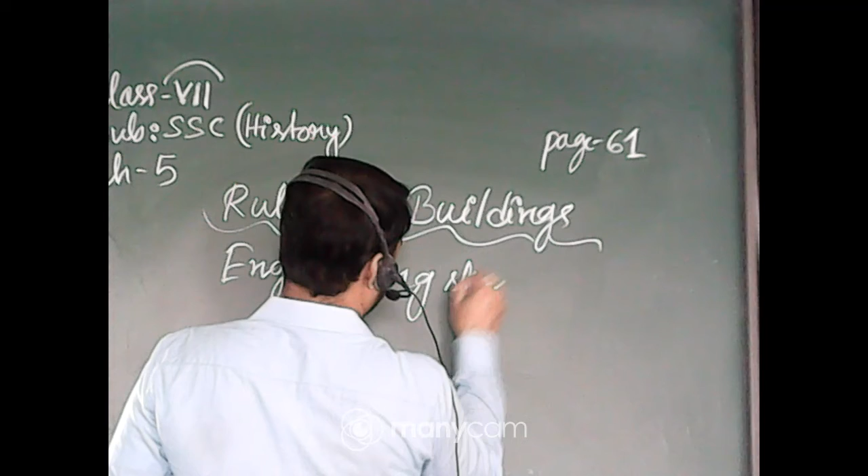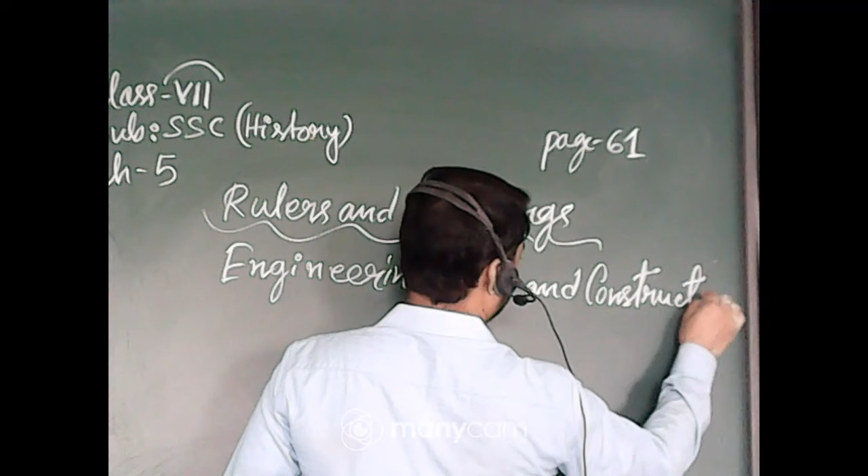Today's subunit I am going to discuss is engineering skills and construction.

So what is the main topic here? I hope you remember the previous class, where I discussed how rulers prioritized the temples, monuments and palaces which were built during the medieval period. Medieval period means 8th to 18th century.

And monuments provide an insight into the technologies used for construction at the time. Take something like a roof, for example. We can make this by placing wooden blocks or wooden beams or a slab of stone across the four walls. But the task becomes difficult if we want to make a large room with an elaborate superstructure.

Insight means an idea - it gives an idea of how they acquired technology and what kind of technology they used. This is the given insight into their engineering skills. So the task becomes difficult if we want to make large rooms with an elaborate superstructure.

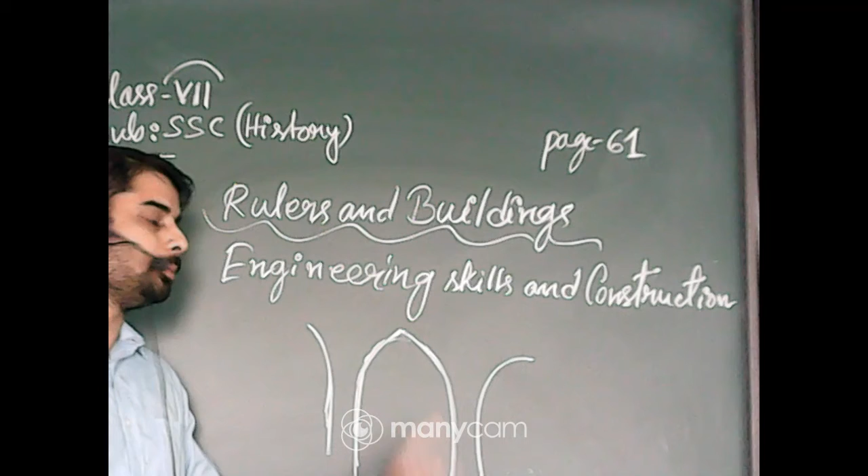This type of Trabeate architectural style can be found in the Quwwat-ul-Islam Mosque, New Delhi, dating to the late 12th century. This type of structure or technology is called Trabeate style, where a horizontal beam is placed across two vertical columns.

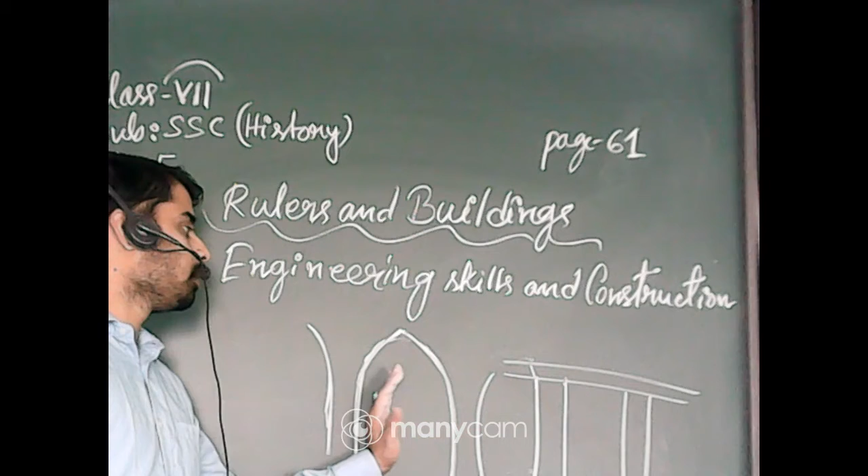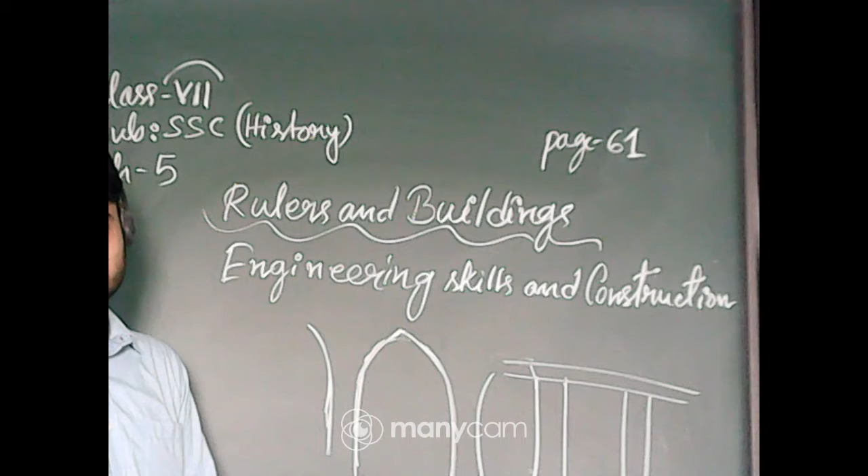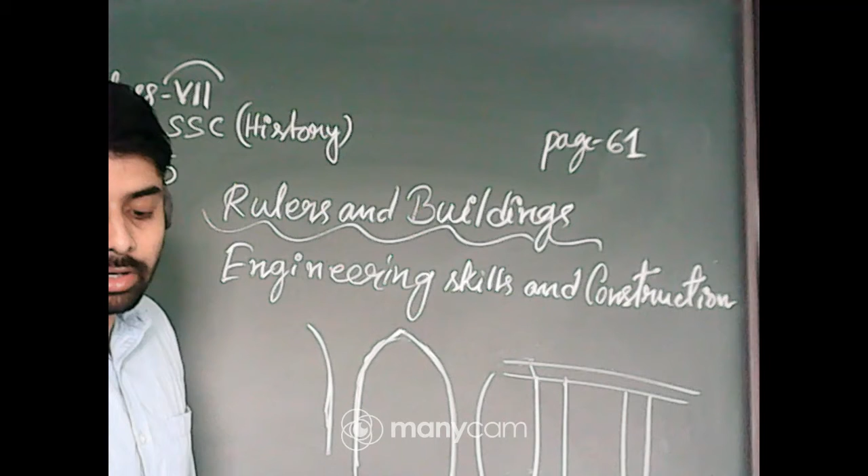Sometimes this type of structure also made straight pillars in this way - this is also Trabeate style, but the most popular one is in India, when the Arabs first came, and the Delhi Sultans made a lot of monuments, palaces and forts using this pattern. Number 2: in the 8th to 13th century, the Trabeate style was used in the construction of temples, mosques, tombs and the buildings attached to large step wells or baolis.

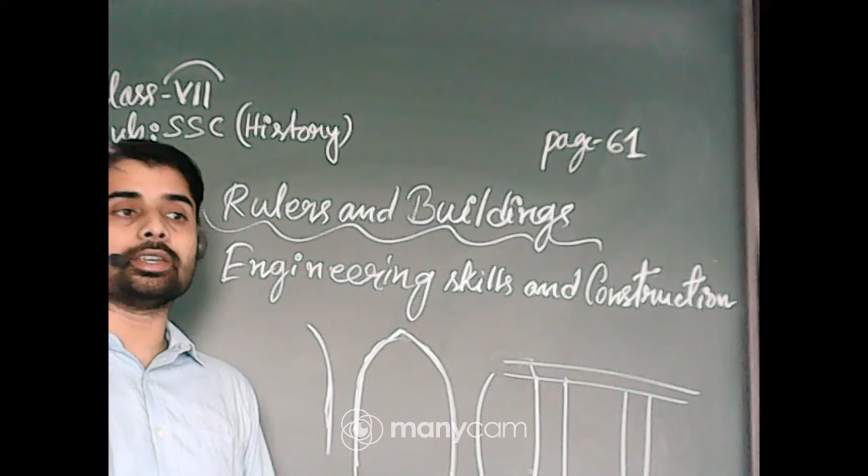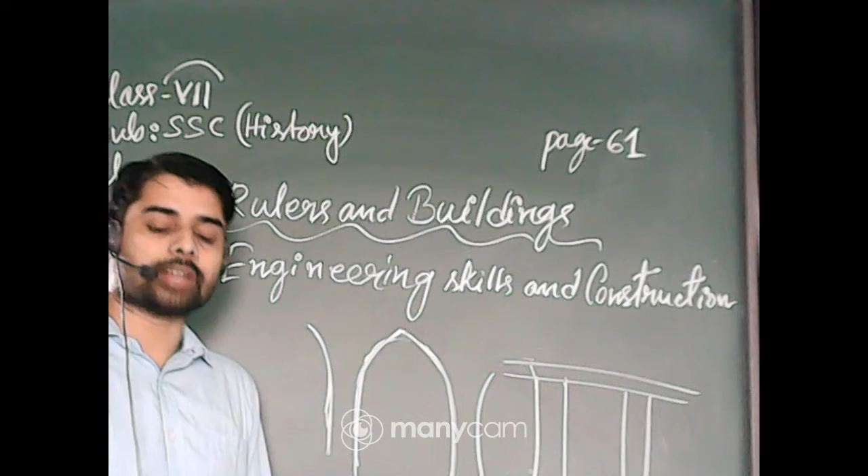What is a baoli? The large stepped wells, such as the Ugrasen ki Baoli present in the Purana Kila region of Delhi, as well as the Rani ki Vav, a World Heritage Site in Gujarat. These are baolis - stepped wells, big wells with steps.

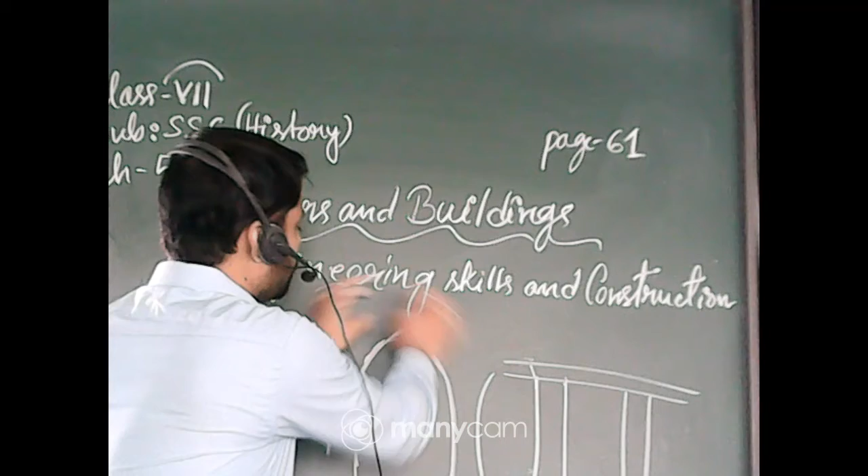All these things were made with this technology, the Trabeate style of architecture, where two pillars were made and joined to make the doors and windows. This is the Trabeate style, with two pillars and horizontal beams.

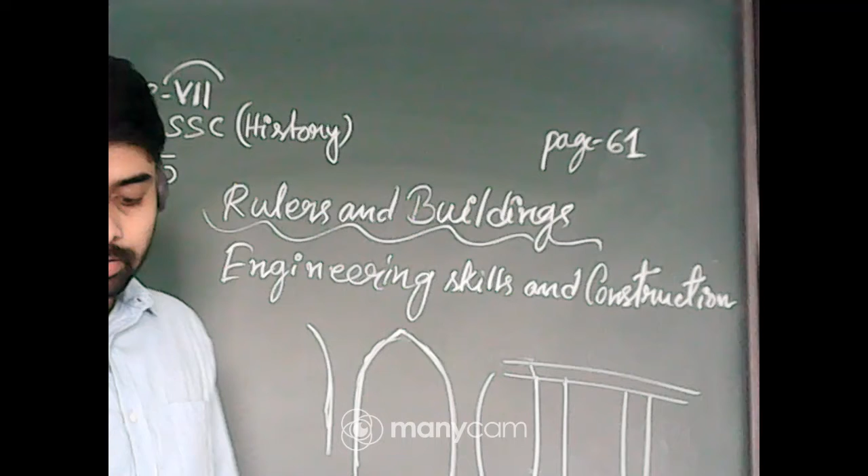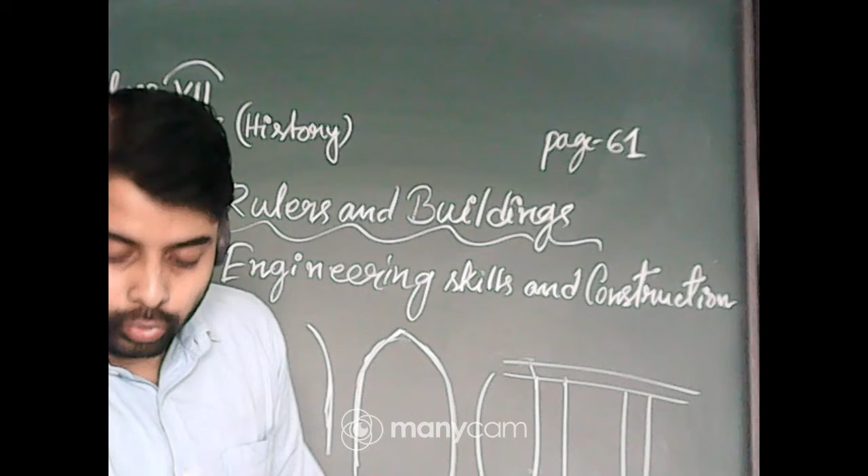Now, temple construction in the early 8th century. Apart from this, how did Indian rulers, Indian kings, between the 8th to 13th century, construct temples? At the time, a lot of temples were constructed in various parts of India.

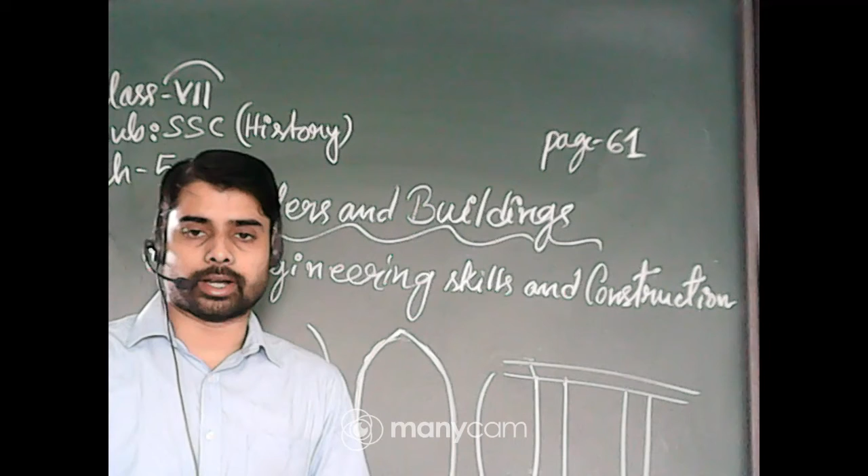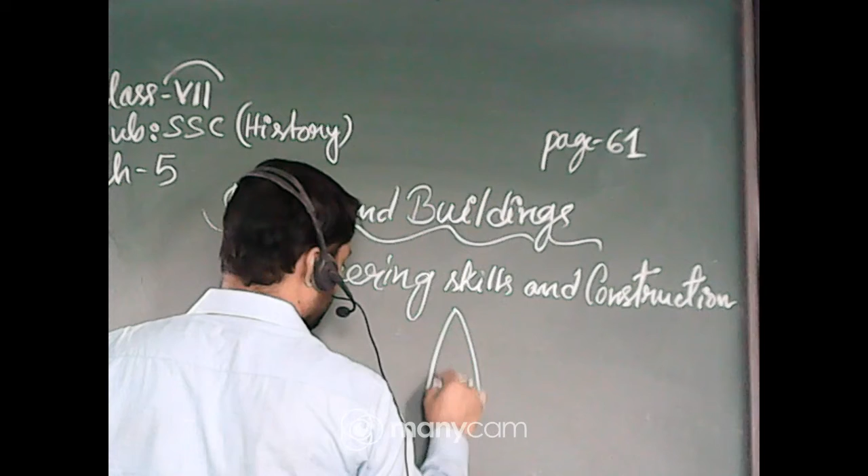Mainly two types of temple architecture were found at the time, that is the Nagara style. Nagara style temples are mostly seen in North India, such as this way - single Shikhara or multiple Shikharas present in a temple.

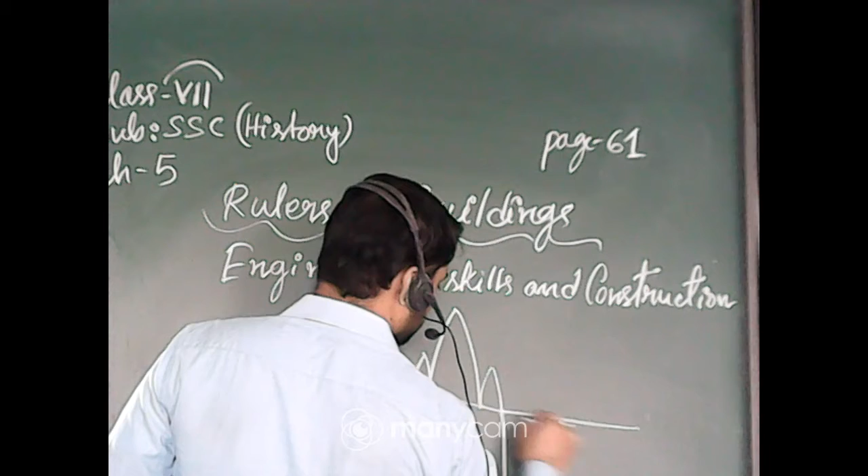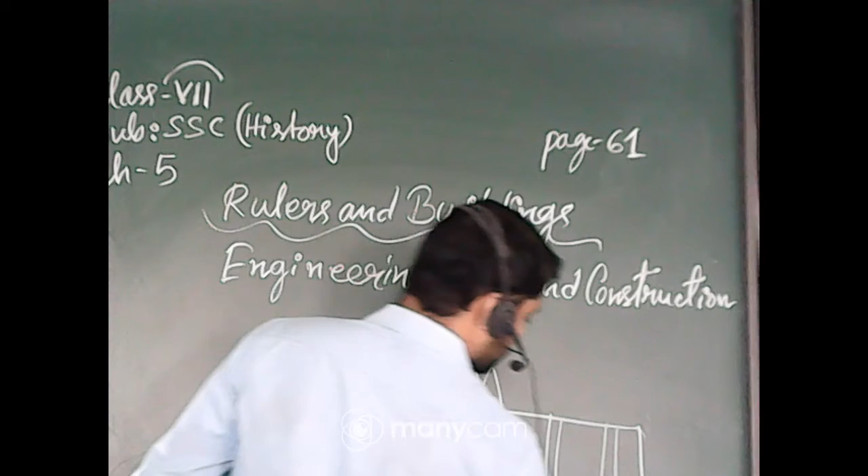There was a mandapa with pillars, present with a staircase. This is the Nagara style, and the Garbhagriha was present. In Nagara style temples, the example given in your book is the Kandariya Mahadeva temple, built in 999 AD.

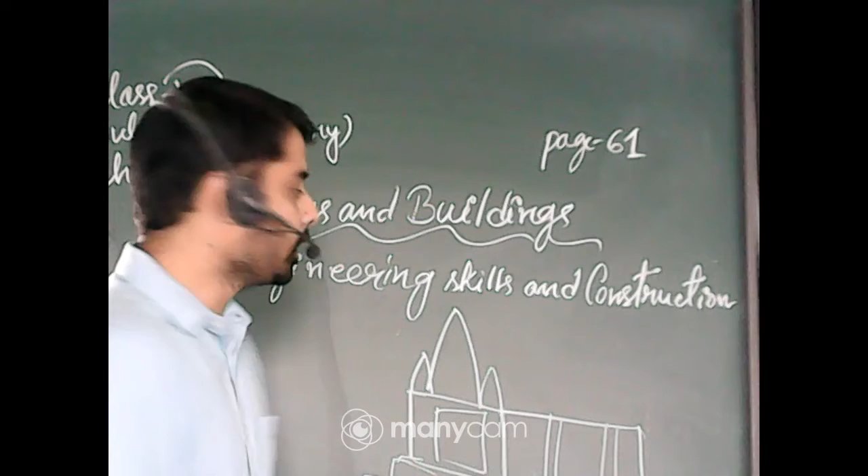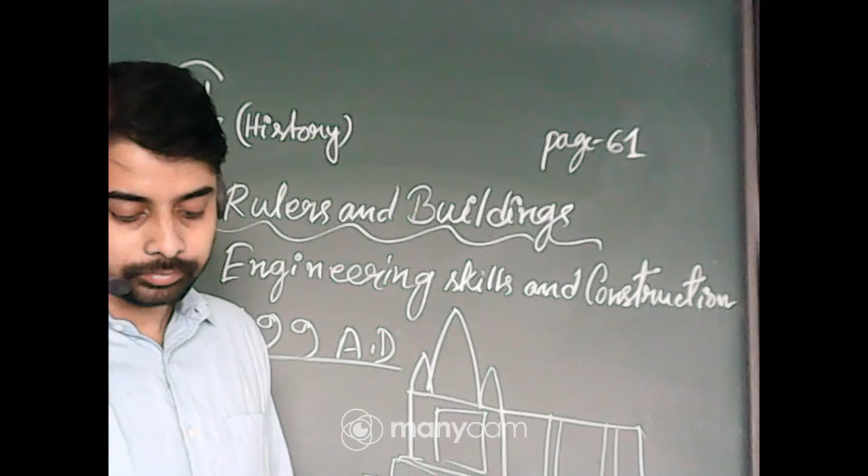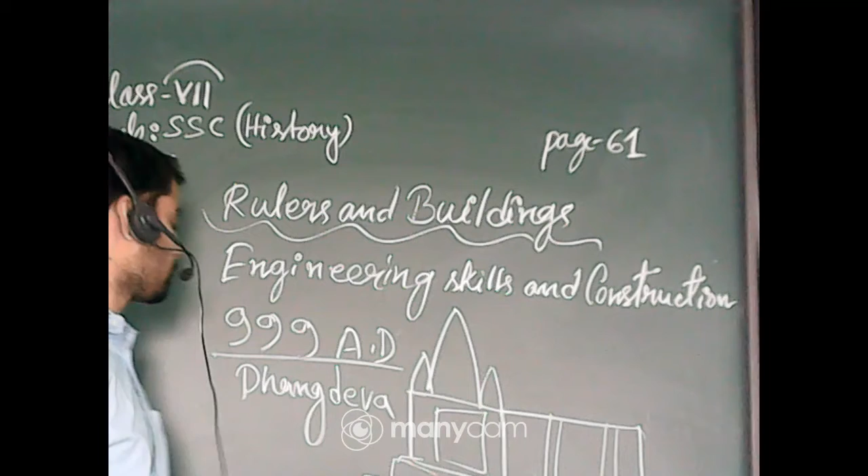It was built by the Chandela ruler Dhanga Deva - the Chandela dynasty ruler Dhanga Deva established this in Madhya Pradesh, situated in Khajuraho.

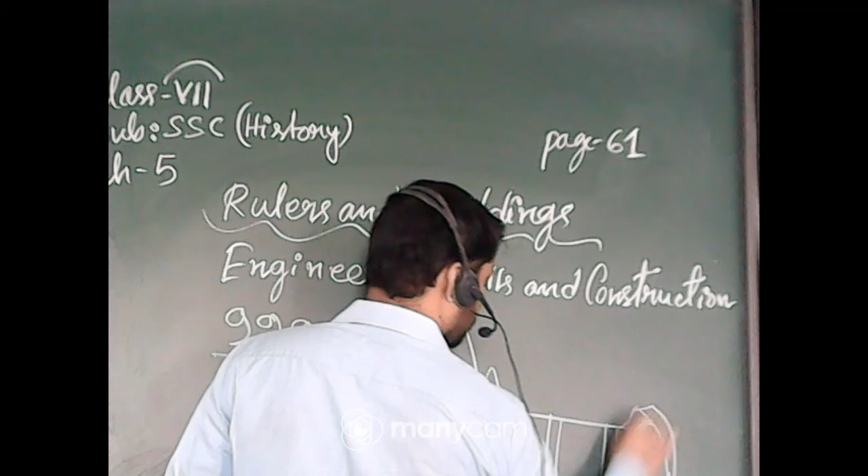The main feature is the ornamental gateway. This is the ornamental gateway, and if you pass through the gateway, you enter into the mandapa, the Mahamandapa, where dancers performed.

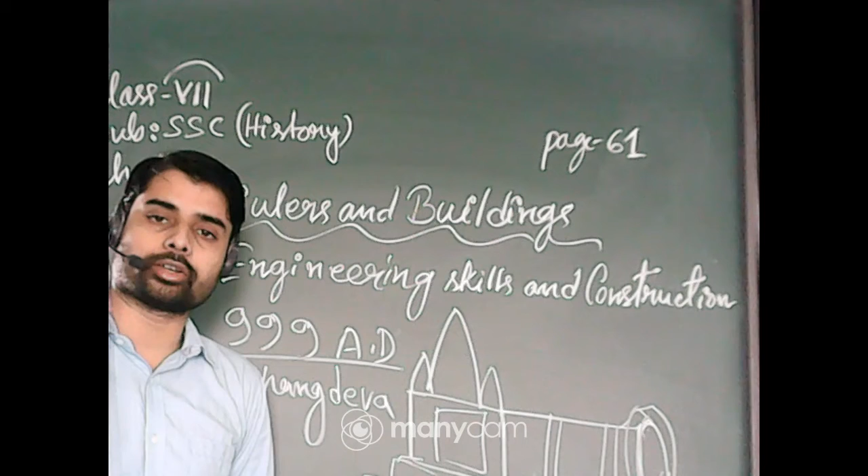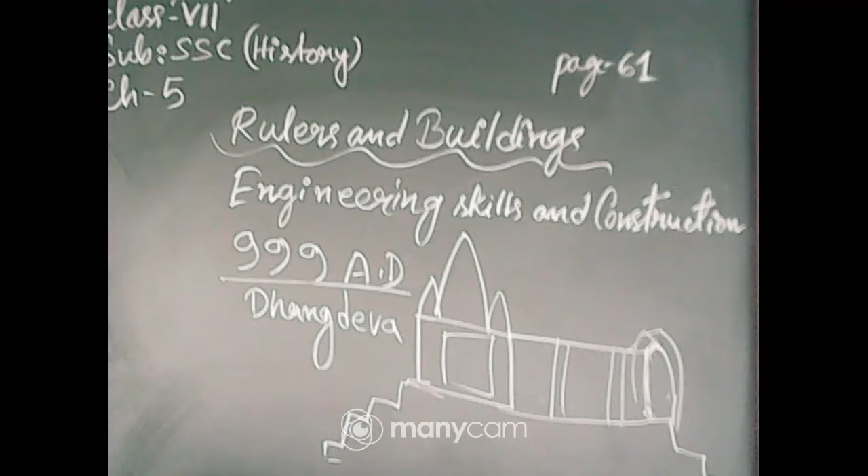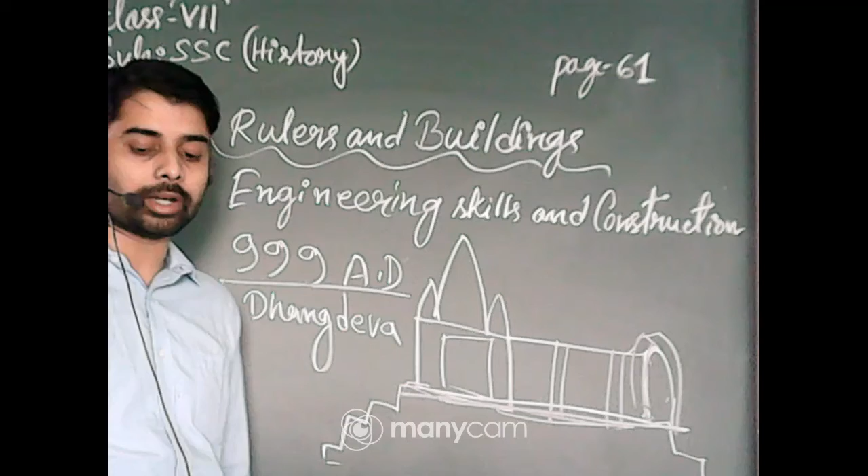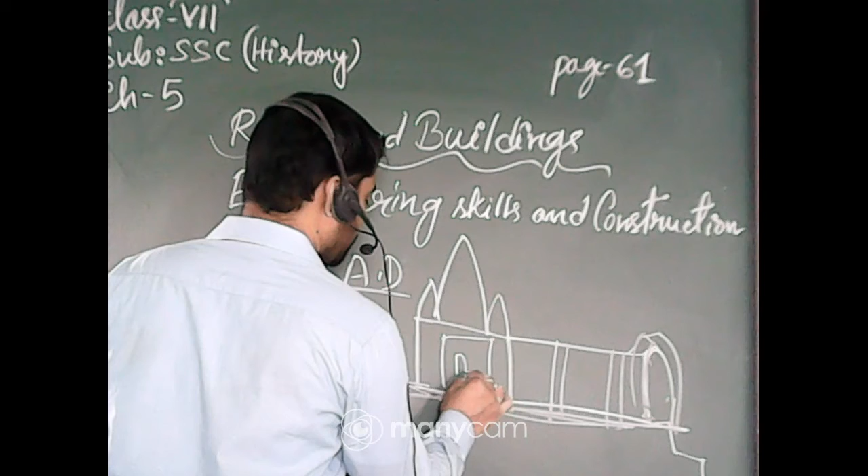So in a platform, this type of temples were established. Dhangadeva made this temple in 999 AD, and the image of the chief deity was placed in the main shrine of the temple. It is called Garbhagriha, the main room, where the Shiva Linga is also placed inside the temple.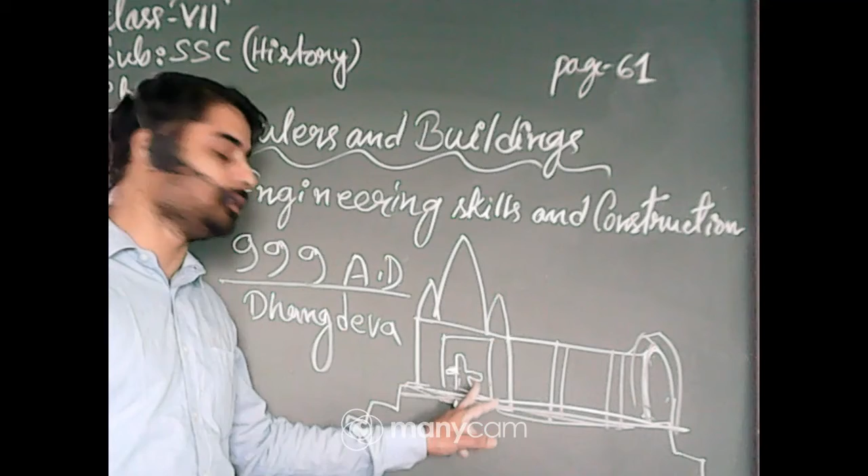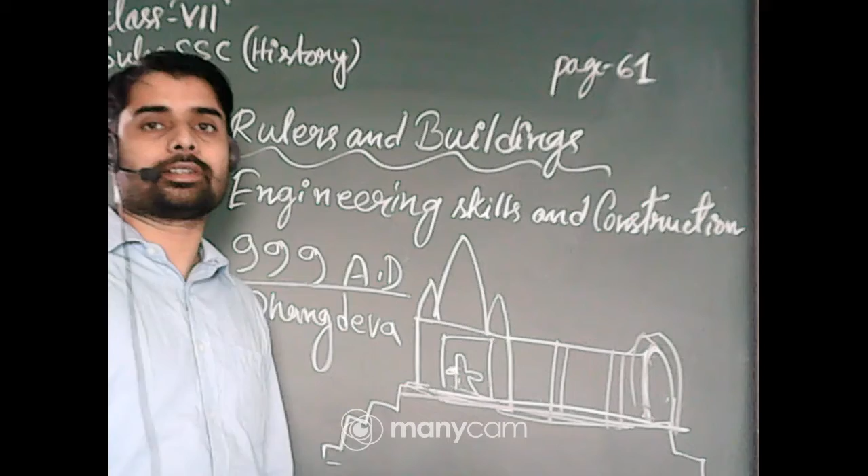It is called Garbhagriha, the central room, and only the king or his family members or his selected main priests can enter inside the Garbhagriha for performing some rituals. The entry is very much restricted. Even in today's temples, you can see that entry into the Garbhagriha or the sanctum, where the god and goddess idols are placed, is very much restricted.

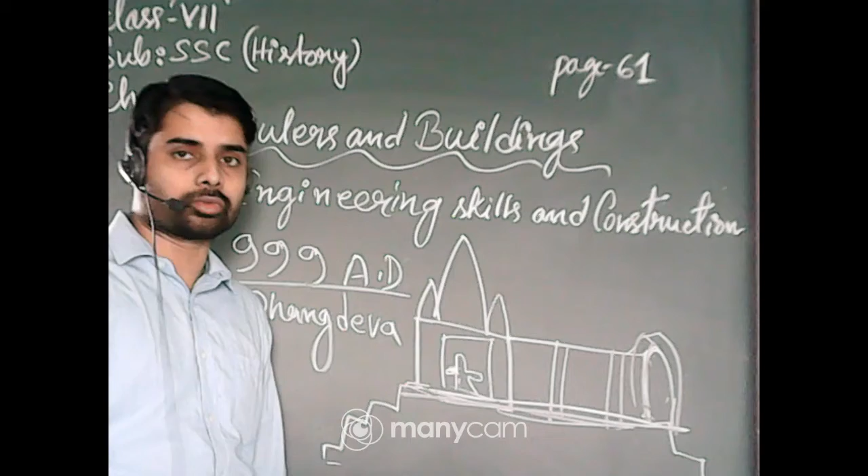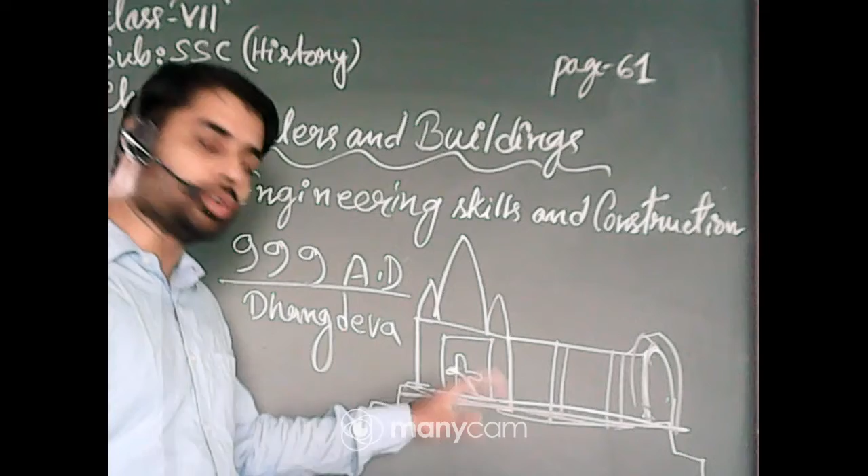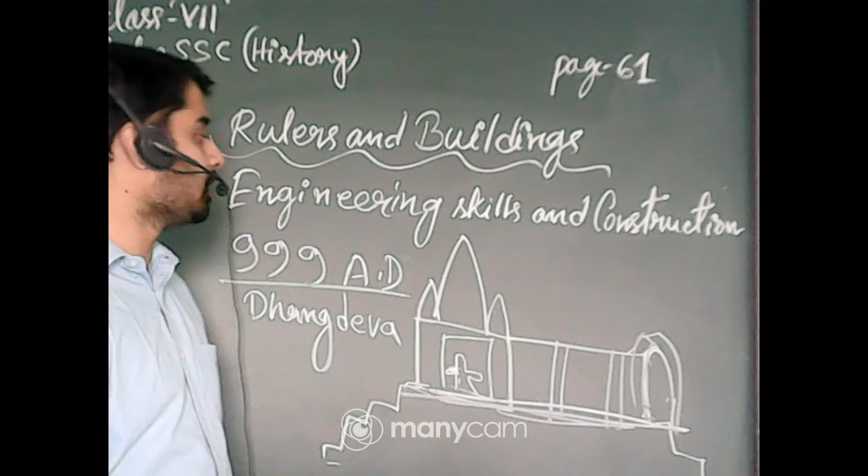Different temple architectures were there, but the main one is the Nagara style, mostly seen in North India. Royal temples also existed. Historians found royal temples in the Khajuraho temple complex where commoners were not allowed, and those temples were totally for the kings.

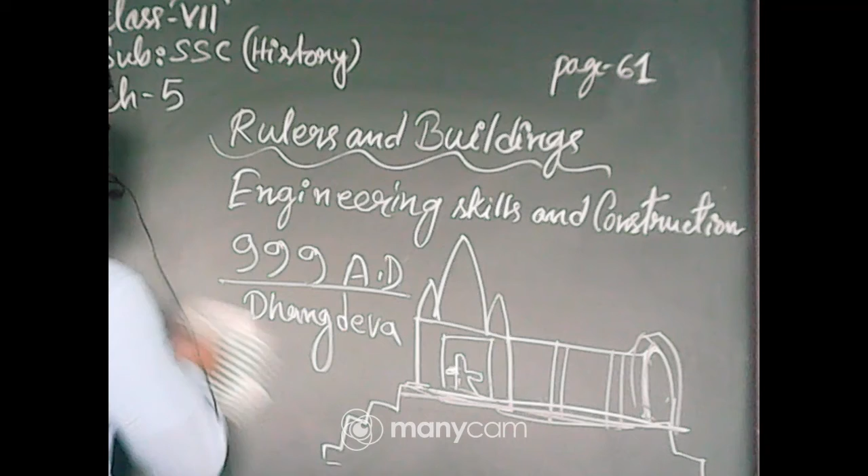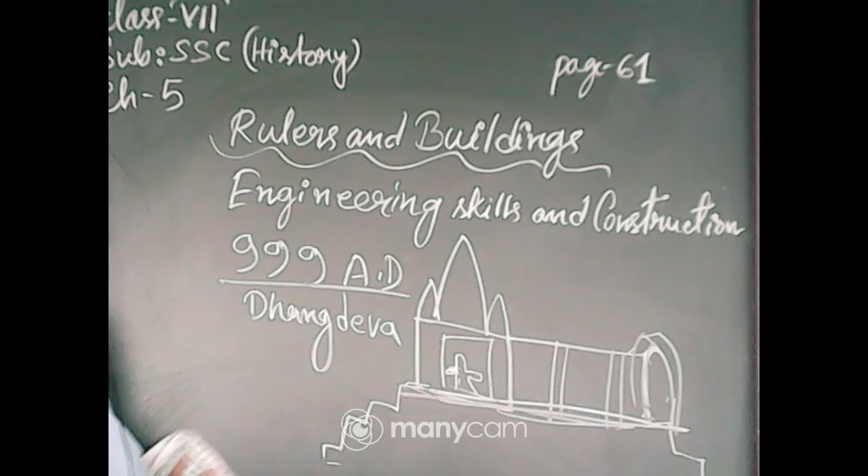So this is the Nagara style. Now the South Indian temples - this is Khajuraho, and remember the name of the temple again, the Kandariya Mahadeva temple in Khajuraho temple complex, built by Chandela king Dhangdeva. The next one is the Gopuram style of architecture.

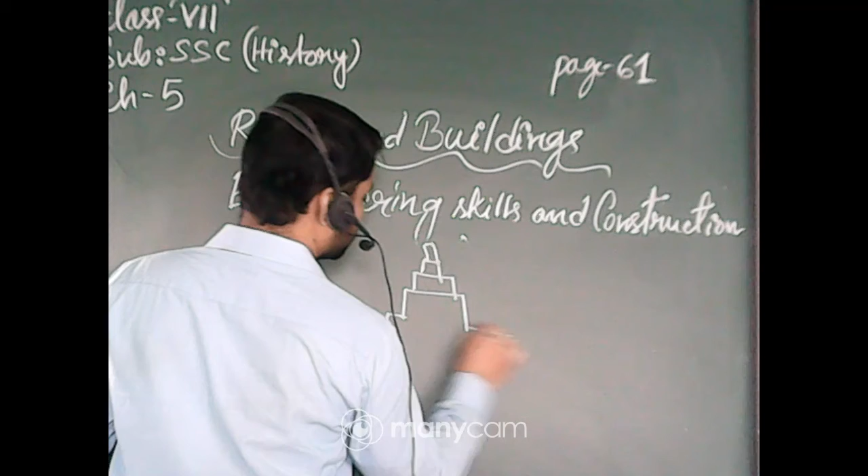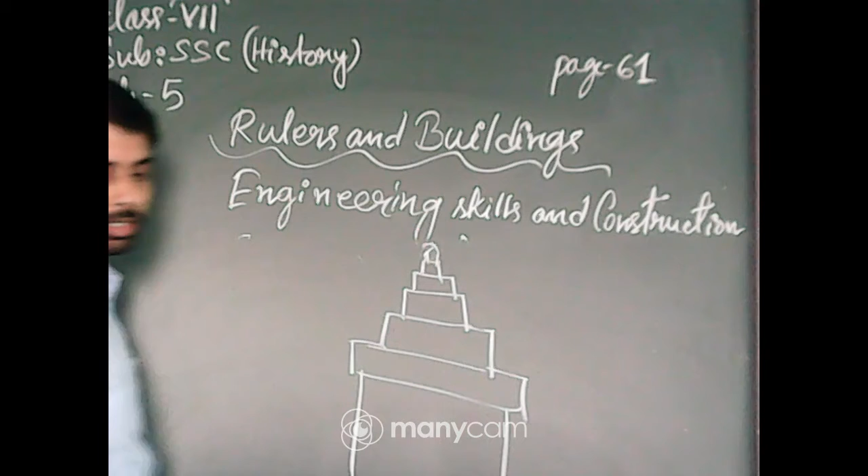The South Indian temples, most of the time, you can see step by step temples with lots of steps. The concept of Garbhagriha and sanctum is the same, but the Shikhara was in Gopuram style. So it is the Gopuram style of temple.

The example given in your book is the Raj Rajeshwara temple. King Raja Raja Chola of the Chola dynasty made this Raj Rajeshwara temple in Tanjavur, and it had the tallest Shikhara among all the temples at that time.

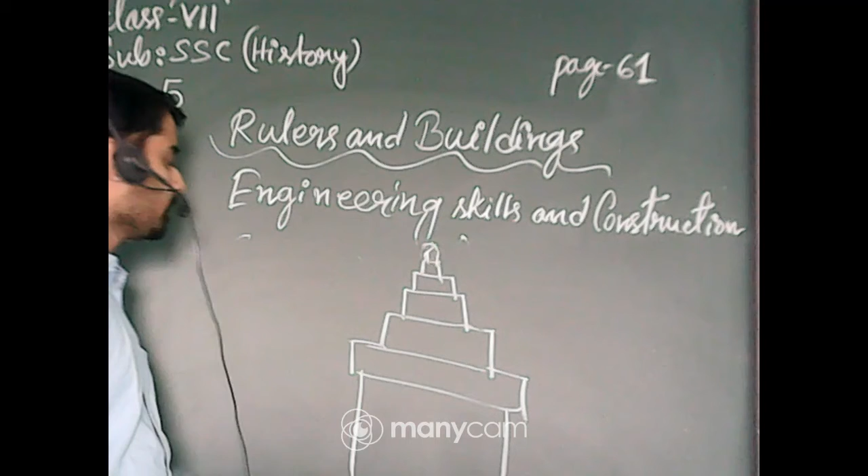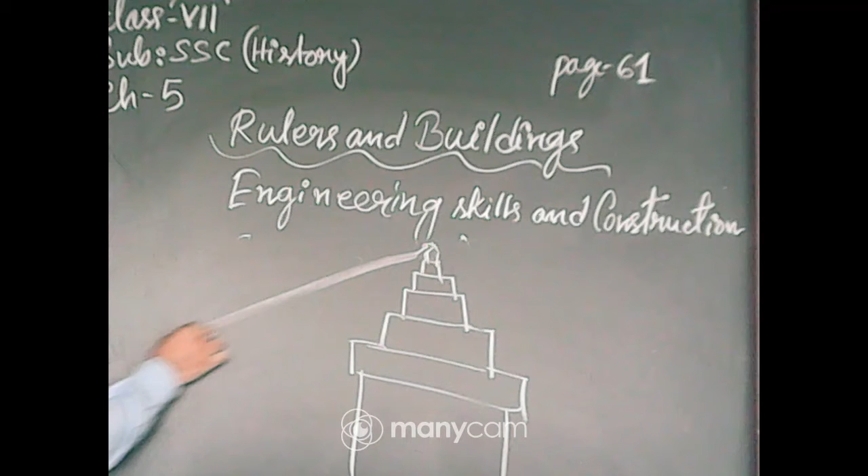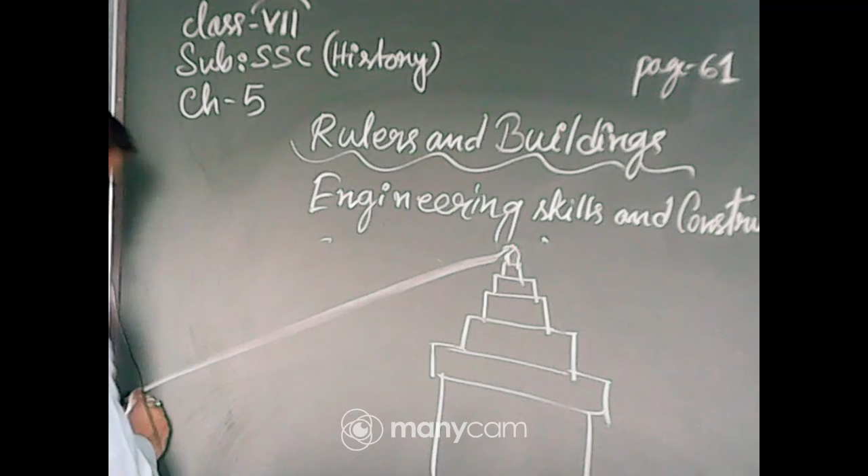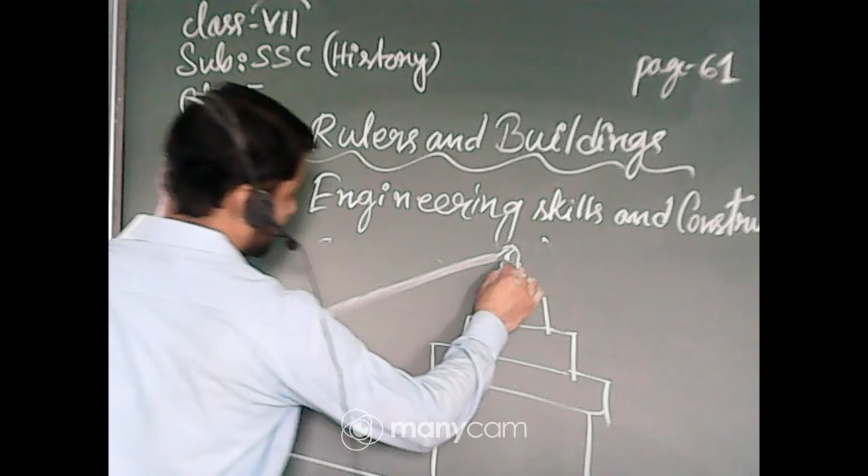The main feature is that when this temple was established by the workers of King Raja Raja Chola, they made a slope from the ground, which was leveled with the ground. The stone blocks were taken there by people, pushed forward and put on top using animals and people.

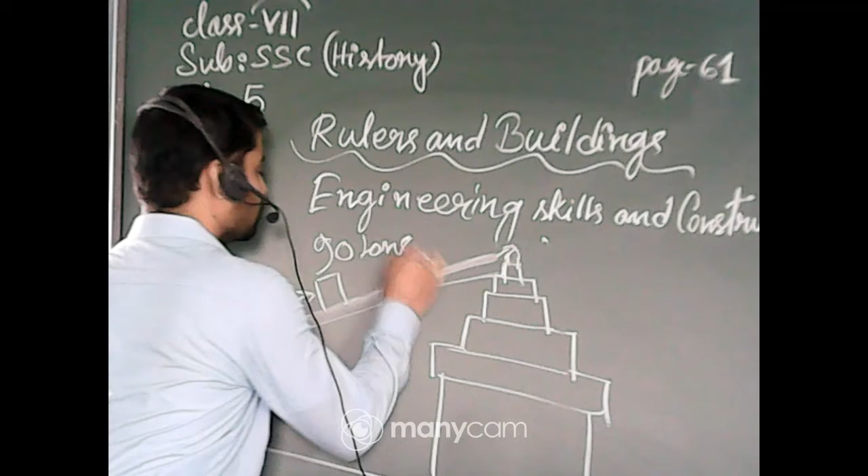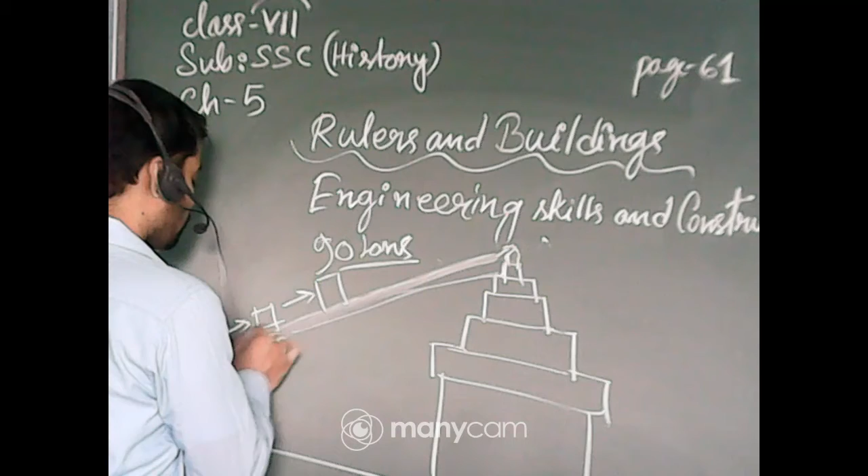This was very hectic because these stone blocks weighed almost 90 tons. So the architects built an inclined path to the top of the temple, placed the boulders on rollers, and rolled them all the way to the top, pushing with the help of slaves and bullocks.

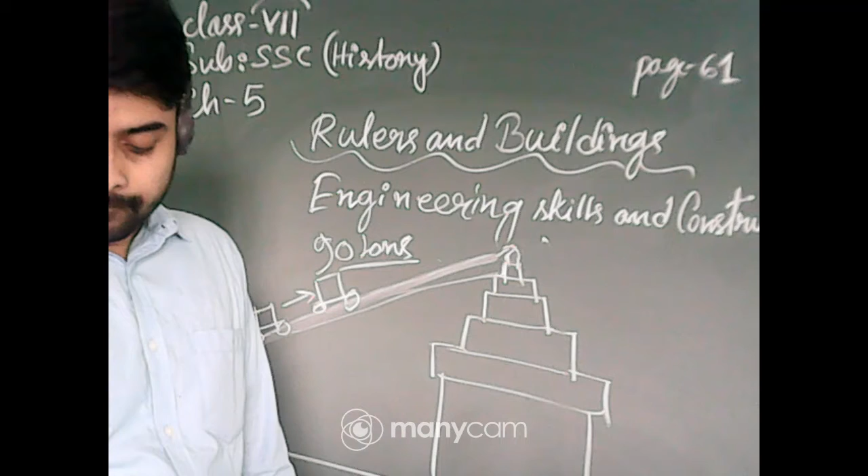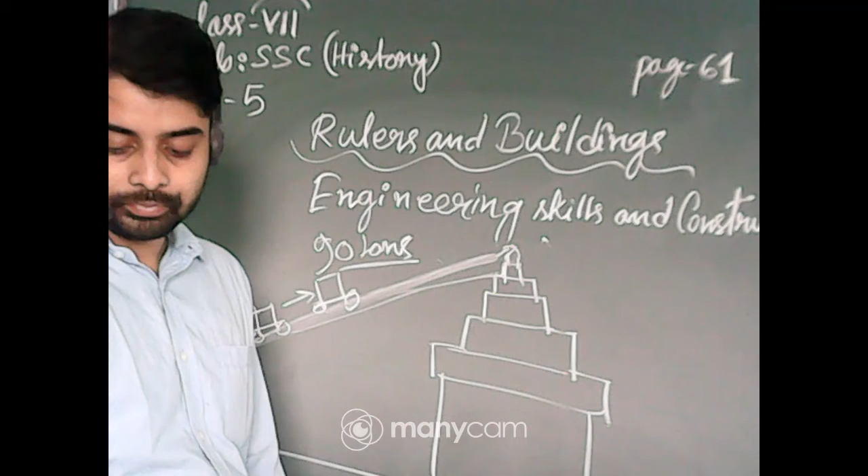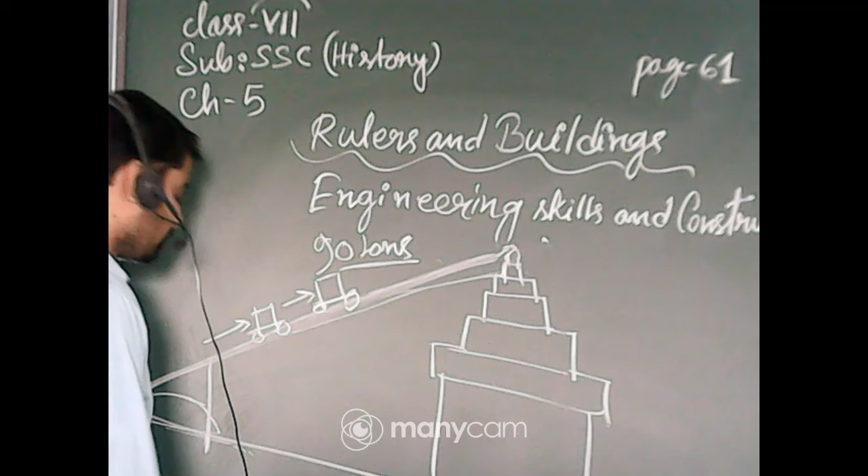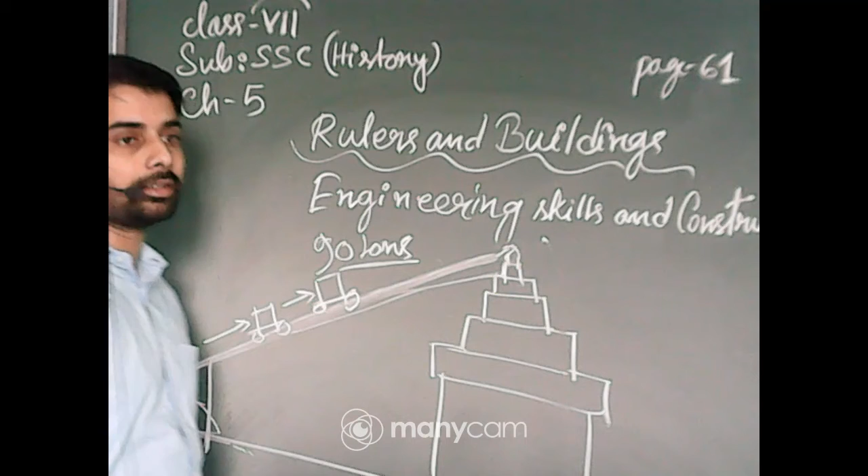The residents of the area remembered the experience of building this type of temple, and that's why some villages were named carrying the memory of the temple construction, such as Charu Pallam. Charu Pallam was a village situated at the place where the inclination started, so Charu Pallam means the village situated on the incline. In this way, they remembered the history of temple construction through village names.

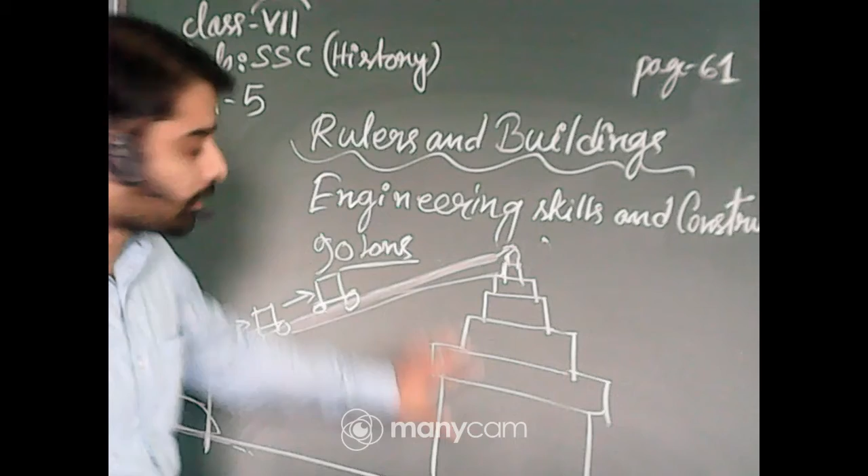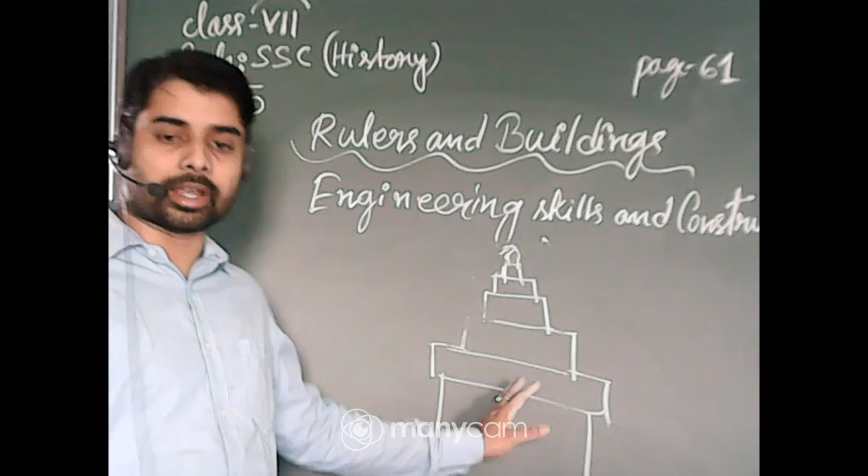When the temple was constructed completely, they removed the sloped path made of sand and soil. Now the Gopuram temple is completed in this way. So any doubt, students, you can ask me about this temple architecture, the Gopuram style and previously the Nagara style. The example given here is the Rajarajeshwara temple built by Raja Raja Chola.

Another feature was that the weight of the superstructure above the doors and windows was sometimes carried by arches, and this architecture is called the arcuate style of architecture. In later centuries, we can see this type of architectural pattern.

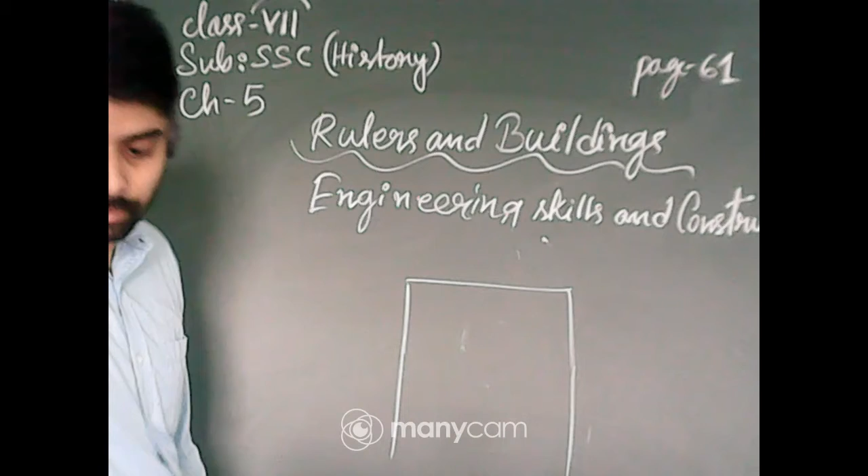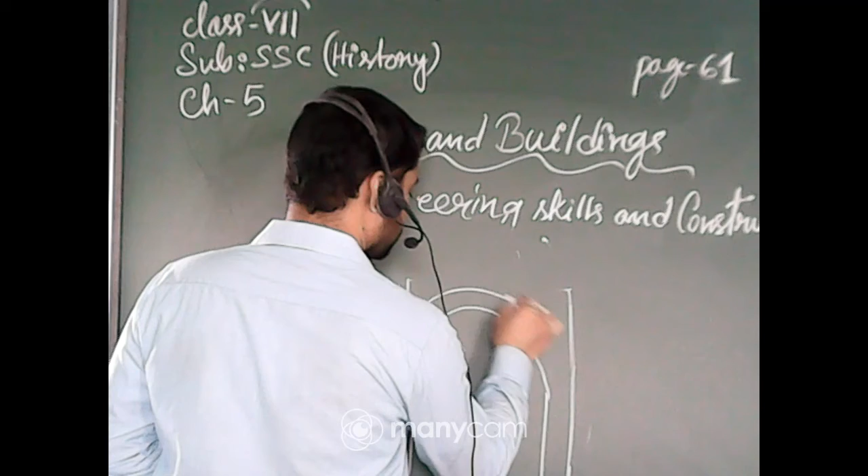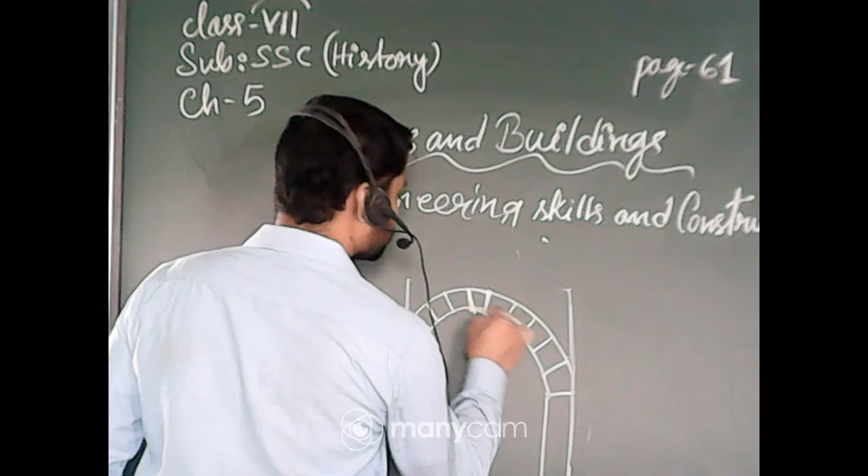To hold the weight of the superstructure, they used this type of arches. In the arches, stones or bricks were placed in this way, and the weight of the superstructure was totally shared among all the bricks. The center stone or center brick is called the keystone, situated in the center.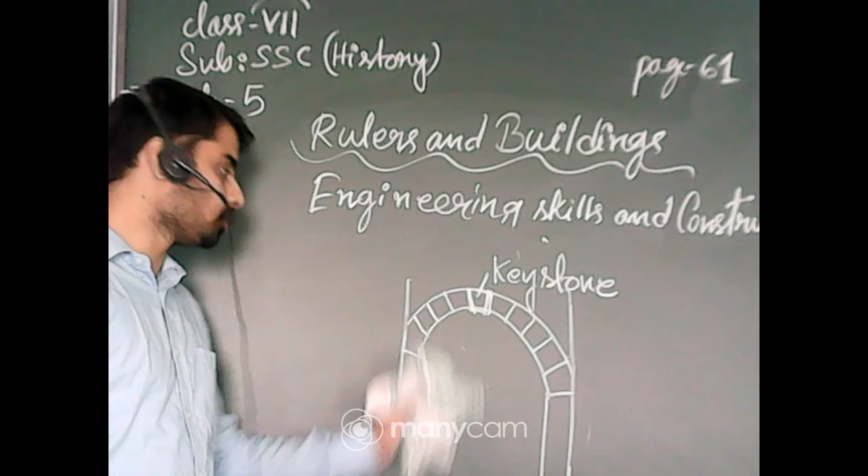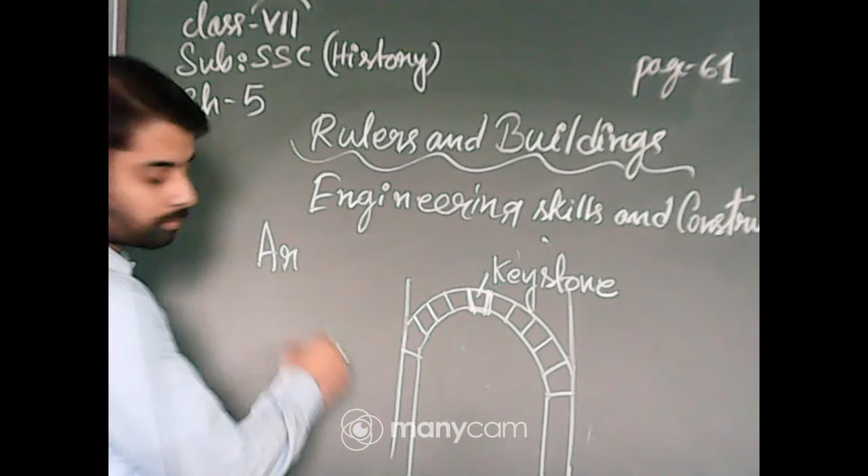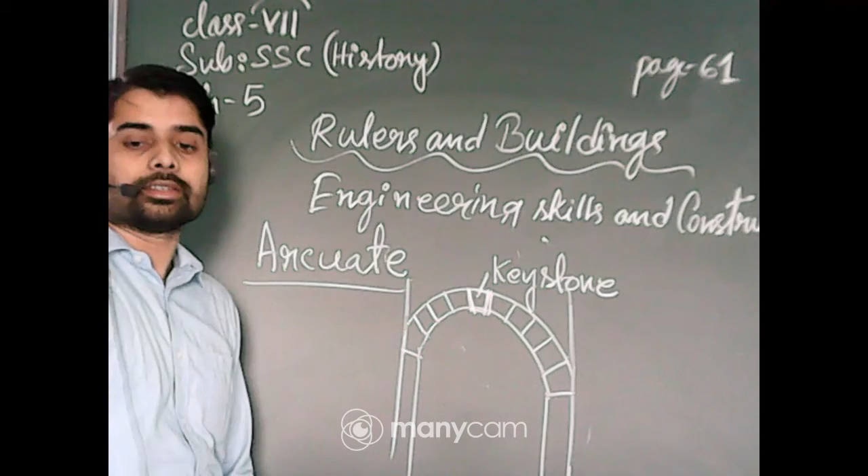So this architectural style, when the weight of the superstructure above the doors and windows was sometimes carried by arches, is called arcuate style of architecture. Another thing is the use of limestone cement - number one is the arcuate style, and number two is the limestone cement.

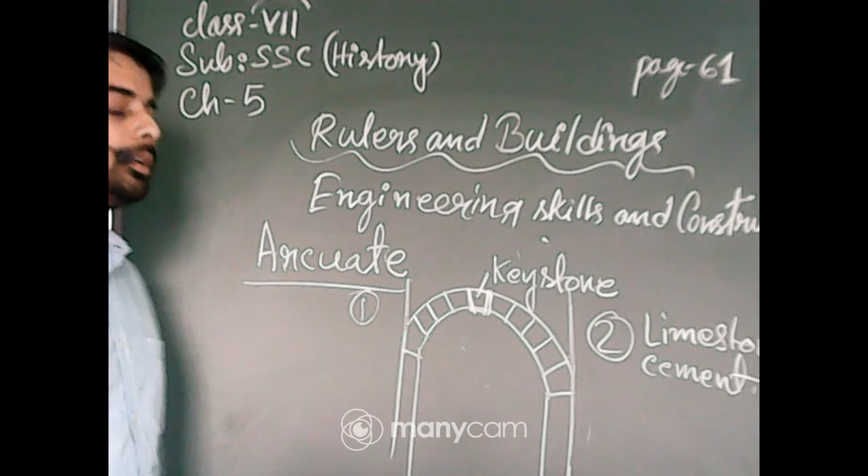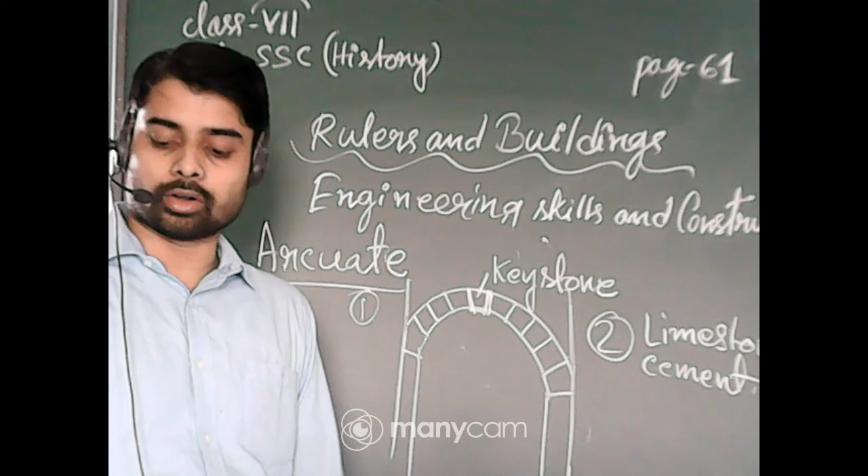That is called chun surki in Bengali - the limestone cement. They mixed limestone with some sticky substance like jaggery or the dust of bricks, and made those beautiful palaces, monuments, tombs and mosques. These were very high quality cement which, when mixed with stone chips, hardened the construction of large superstructures. It was very much used in later phases.